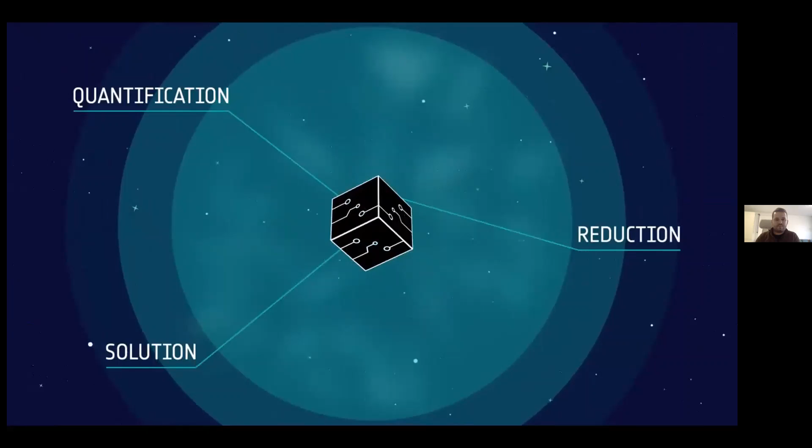The rocket goes up, and at a certain height, it loses its boosters. Where do they land? There are plenty of uncertainties in these calculations, and it can be greatly affected by small disturbances such as temperature fluctuations, wind directions, or pressure changes. Remember the infamous butterfly effect? A small change in one state of an input condition can result in large differences in a latter state. We call this kind of calculation the propagation of uncertainties. It sounds like fuel for a spaceship heading to infinity and beyond, but it is a real deal in the space industry. Space engineer Martin Kubíček came up with an algorithm that can crunch all the data and uncertainties, analyze them, and give them the structure and clarity in the form of the probability model. The probability model can be further understood and reduced, which enables it to have better accuracy, overcome critical moments, and reduce the costs. Engineering processes, like a plane or car design development, face the same issues with uncertainty similar to booster landing. For example, how will the change of rear rail's diameter affect the car if the driver steps on the brake while driving 60 kilometers per hour? How about at 150 kilometers per hour? For calculations like this, Kubíček's company UptimAI developed a unique tool, an algorithm, an engineering probability data cruncher per se. Same as with the rocket ship, UptimAI can crunch the numbers and give you a better answer than any supercomputer can. Quantification, solution, and reduction. UptimAI answers the question of probabilistic engineering design. With mathematical modeling, it reduces risks and saves money. Meet UptimAI, one of the incubatees in the European Space Agency Business Incubator that brings space for your ideas.

Okay. So as the video said, our tool was firstly developed during space research activities by our founder, Martin Kubíček. And Martin originally developed this solution to estimate the impact area of space debris. Then ESA realized that the solution is really interesting and it can be used in a wider portfolio of applications. So they invited us to ESA Business Incubator Center in Prague, and we became a part of so-called technology transfer, and we redesigned this tool to be used in computer-aided engineering.

And what makes the tool special is the fact that it combines Martin's fundamental mathematical discoveries with elements of artificial intelligence and machine learning. We shortlisted 3 main difficulties that engineers in simulations were facing. And we realized that the most common one is that sometimes it's hard to understand dependencies between inputs and results of simulations, especially when there are a lot of inputs.

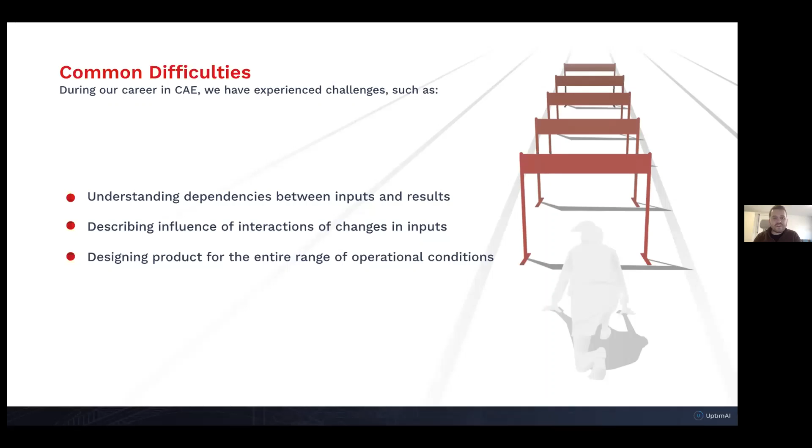Secondly, when you have multiple changes of inputs at the same time, it's hard to understand how these changes are interacting with each other. And then you always need your product to work well in the whole range of operational conditions. And this is quite complicated. So this is the third thing that we are solving using our solution.

What our solution does in a nutshell: we connect our tool to a simulation platform, and it automatically generates a mathematical model which describes dependencies between inputs and results. Then when the model is ready, it provides engineers with deep insights into what's happening inside the simulation and what they need to change in order to design a good product. And thanks to the artificial intelligence, we made our tool highly adaptive. So we can build a model really fast. So we can cut the total number of simulations by up to 90%.

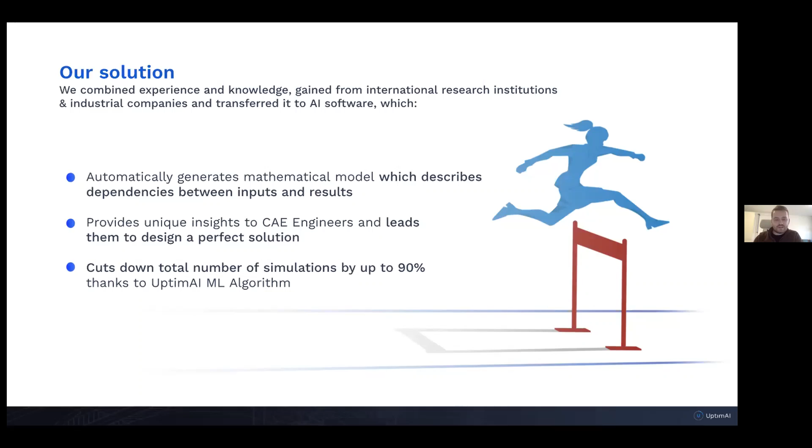And our tool starts running the simulation repeatedly, always with a different set of inputs, and it's building a mathematical model, or so-called surrogate model, in the background. And when the model is precise enough, because you set the precision first, it provides really easily readable outputs to the engineer.

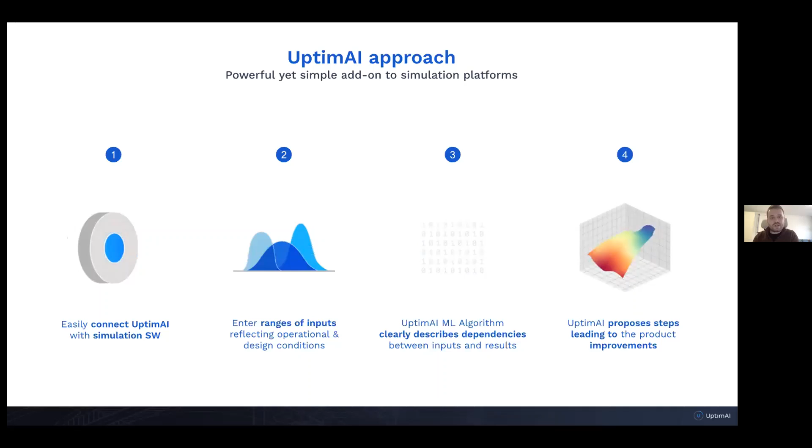We have many more features than that. You can check them out on our website. These are just three to give you an idea of what we can provide.

So I'd like to summarize the benefits. Using our tool, engineers can significantly reduce their workload because we can simplify the decision-making process. We provide them insights, and when they use them, they are able to approach the task strategically and see all those dependencies and connections between the inputs and results, and hence they can improve their product in a very easy way.

And it can uncover unexpected product behavior and its reason, because we can show engineers what is causing the troubles, what combination of parameters, and how they need to change it in order to make the product a better product.

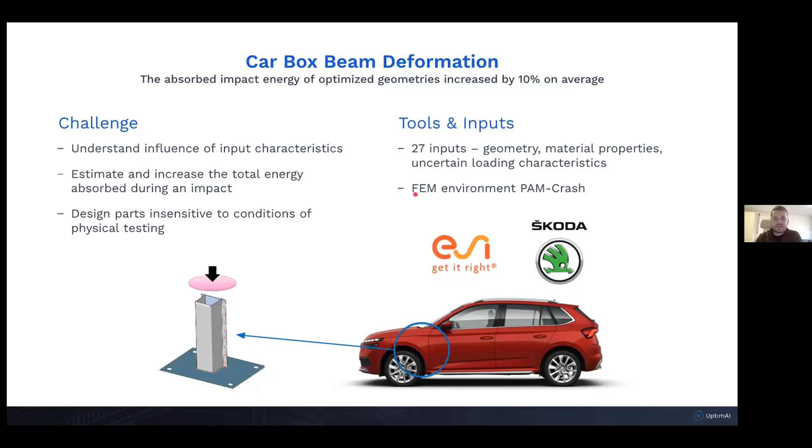The goal in this task was to understand the influence of input characteristics. Then we needed to understand what's influencing the total energy that is absorbed during the impact. And we wanted to design these parts to be insensitive to conditions of physical testing, because there was a big range of results before we implemented our solution. We had 27 inputs here, geometry, some material properties, and some others. And we were solving it in the FEM environment PAM-CRASH.

Then we realized that they need to build each part with a different thickness, because when each part has the same thickness, it's not absorbing that much energy. They initially thought that they need to increase the thickness of each part, but it was making the test more expensive, because they needed to use more material, obviously. And we realized that it's not that important to make it thicker. They just need to have different thicknesses, because then it causes so-called guided collapse, and it can increase the absorbed energy.

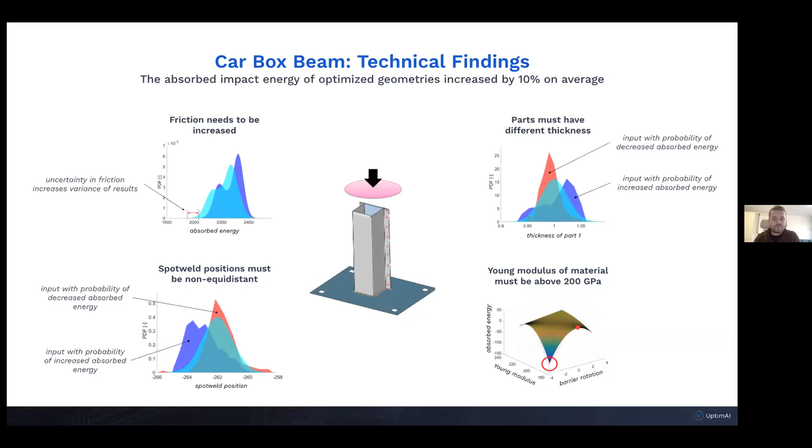And using our increment function, we realized that if you combine barrier rotation, Young's modulus, and absorbed energy, when the Young's modulus is below 200 gigapascals, there is a significant drop in absorbed energy. So they need to use a material that has a Young's modulus higher than 200 gigapascals to achieve a great amount of absorbed energy.

Here you can see the results. So we helped them to better understand the impact behavior. And thanks to it, they were able to increase the absorbed energy by 10%. So you can see here, from 2000 we went to the area of higher increased energy. And we were able to decrease the range of results, because it was ranging from 2000 to 2400. And here you can see that the range after implementing our tool was much smaller.

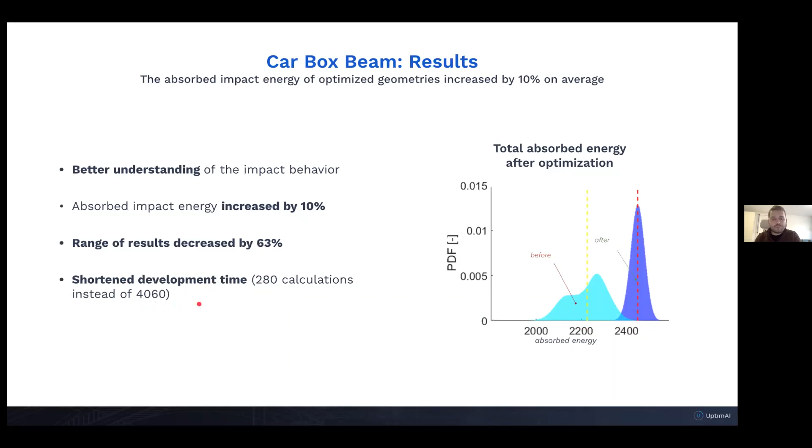And all of this we were able to do with only 280 calculations instead of 4060, which would be required with some polynomial chaos method. The thing is that one calculation took 1 hour in this case. So it was a huge saving of computational power and time as well.

Another case was done with a company, Altran. It's a local branch of Altran here in Czech Republic. And the goal was to investigate stress and forces on this tripod. This tripod has 3 actuators that are displacing in order to move the top plate, which holds an optical element on the top of it. We wanted to find out what are the possible ranges of manipulator movements, estimate the forces and stress levels, and find out what is really causing the increase in stress and so on.

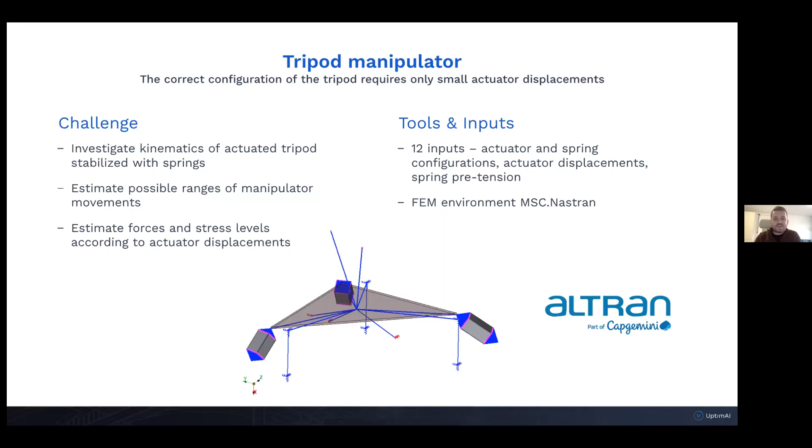We had 12 inputs. These were actuator and spring configurations, then displacements and spring pretensions. And it was done in the FEM environment MSC Nastran. Here they were wondering if there is any connection of the actuators, if there is some actuator that is affecting the stress more than the other ones.

And we started with looking at individual actuators, and we realized that, as you can see here, actuator displacement alone cannot eliminate the stress completely. So it can decrease the total amount of stress, but it cannot eliminate it completely because there is a spring pretension. So stress cannot be decreased under 100 megapascals. Then we realized that any actuator displacement increases stress. So it's not that some of them are more important than the other ones. It just increases stress when they are displacing.

And then we looked at the sensitivity analysis, and we saw that the interactions of the parameters cannot be neglected. And here you can see that there is a notable influence of all the displacements. So when it comes to the stress in this part, it's all about displacements. So it would be good to focus on the other parameters, such as spring positions and spring pretensions, because these are not affecting the stress that much. And the last thing was that we found out that only small displacements are preferred, because when the displacement grows, there is a significant increase in the stress level.

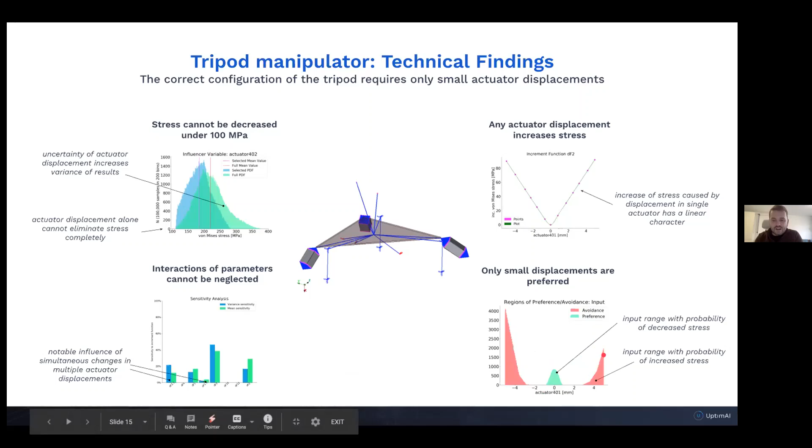So again, we helped them to understand the tripod behavior and what parameters are influential to the overall result. We realized that the spring position does not affect the stress level. So it's good to work with those positions because it can affect the movement of the optical element, but it's not increasing the stress levels as much as those displacements.

And again, we had 12 input parameters and 10 results, and we were able to do it quickly. We only needed 155 FEM computations in order to build a very precise model. And because we realized that some of the input parameters are not important at all, we were able to simplify the whole design of the task.

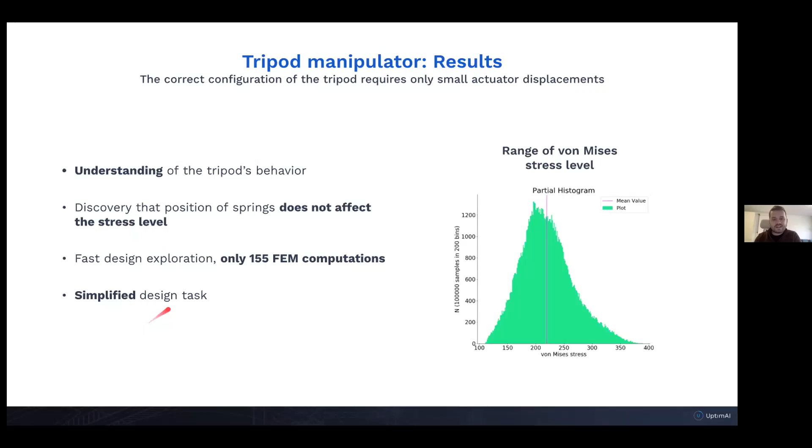And the last one is called pressurized body. This is a lightweight body part. It's a mock-up of some turbine engine, and we made this task in cooperation with Brno University of Technology. And the goal was to find out what is the influence of stiffeners located on different diameters on this part. The ultimate goal was to improve the safety factor while keeping the weight of the structure.

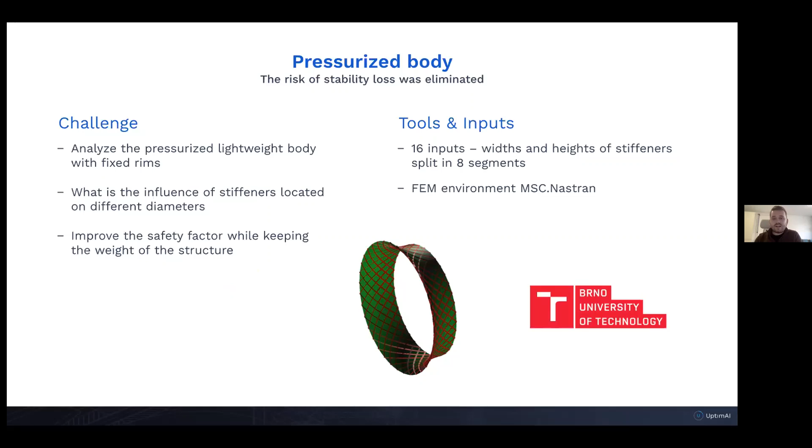We had 16 inputs there, width and height of stiffeners, and they were split into 8 segments. So some of them were on the edges, some of them were in the middle. Again, it was done in the FEM environment MSC Nastran.

We started with sensitivity analysis and realized that stiffeners that are on the edges have really low impact on stability. So it means that we completely had to focus on those that were in the middle of this part. This tool showed us something that is logical, but it proved that our tool is right.

And this is the information that you need to always increase both height and width of each stiffener, because if you have a stiffener that is high enough but not wide enough, it will cause you a loss of stability. So both dimensions of each stiffener have to be treated.

Here you can see that if you don't treat the interactions of the geometry, it can again cause a tail that increases the probability of failure, because here's the area of stability loss. So again, it just confirmed that when it comes to stiffeners, you need to always take care of width and height in any case.

And at the last graph, you can see that stiffener height is most crucial for the stability improvement. So it has to be above 3 millimeters, because if it's below, there's a growth in a stability loss probability. And on the right, it's growing. So it means that it's better to achieve or build a higher stiffener.

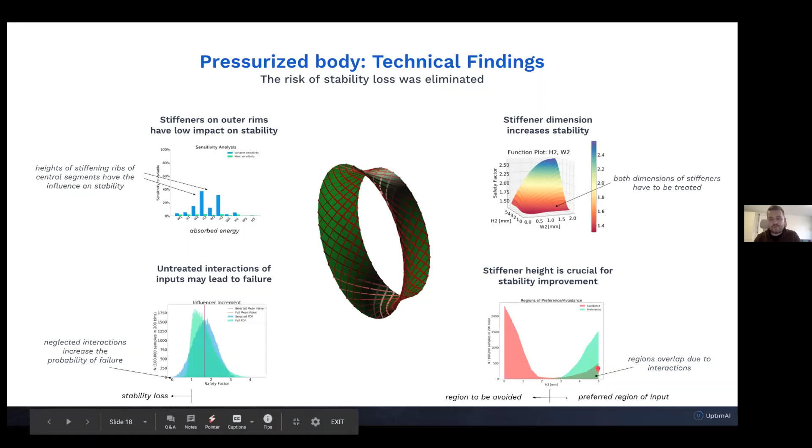But as you can see, there is some region overlap, and this is again due to interactions. So if width wasn't enough, then it would mean that there would be an increase in the probability of loss of stability again.

In this case, we were able, by improving the geometry of this part, to increase the safety factor by 235% on average. So you can see the original distribution and the improved statistical result. And as you can see, again, it's a range. So it means there is enough space for production tolerances and so on.

New ranges eliminated the stability loss, which was the goal. And we were able to select only the important geometrical parameters for further design. So it means that by deleting some stiffeners that were on the edges, we were able not only to maintain the weight of the part, but even to decrease the weight itself. So this was the third case.

I would just add here that all of them were in FEM. This wasn't my intention, I realized it right now, but we can work with CFD, thermodynamics, or any other simulation as well, because as I said, our tool is purely mathematical. We only work with the numerical inputs and results. So we have no problem connecting it to any other simulation platform.